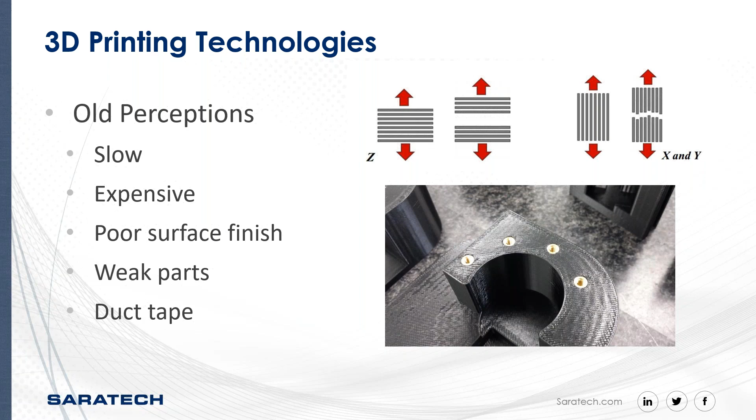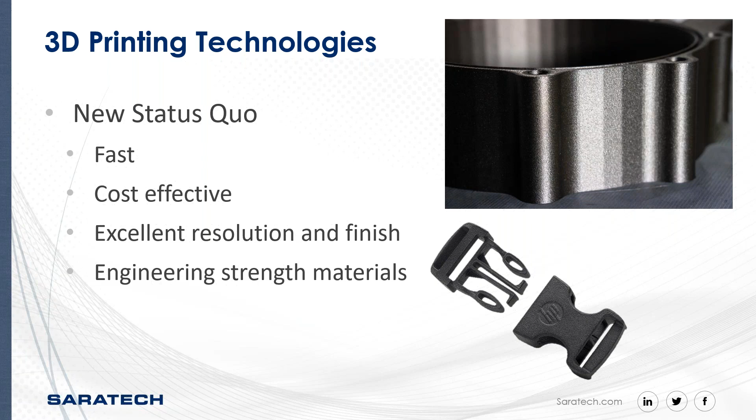As an engineer, we love duct tape, right? But we don't think of it as an end solution to anything. We think of it as a quick fix. And this really isn't the case anymore. 3D printing technology has come such a long way. It's fast, it's cost effective. As you can see from this photo in the top right, the surface finish is excellent. The machines have high tolerances now, and they're using engineering strength materials that have been tested and have data sheets with them. So it's really come a long way.

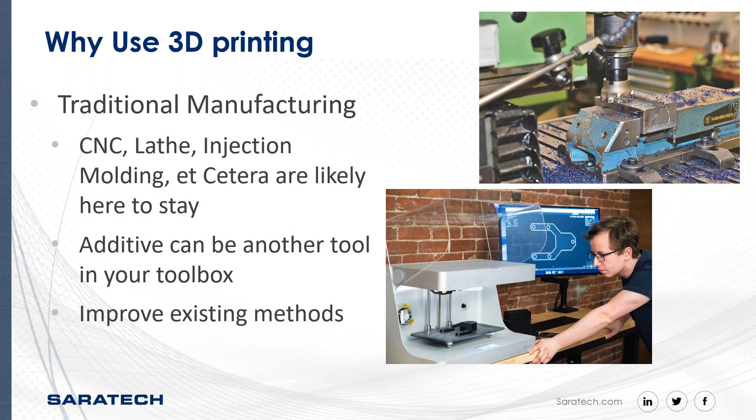And I think that's part of the reason we're seeing the adoption. Now, why use 3D printing? Well, traditional methods aren't going away. Your CNC mill, lathe, injection molding machines, they have their foothold and their use cases. However, additive manufacturing can be another tool in your toolbox. They can be used to replace some of these traditional methods in some cases, or you can use them to augment and improve your traditional methods. Think about a hybrid solution. Maybe you can't replace a machined metal part with a 3D printed plastic part, but you can 3D print the work holding fixture, and that has great time and cost savings associated with it. So that's kind of some of the use cases we'll look at.

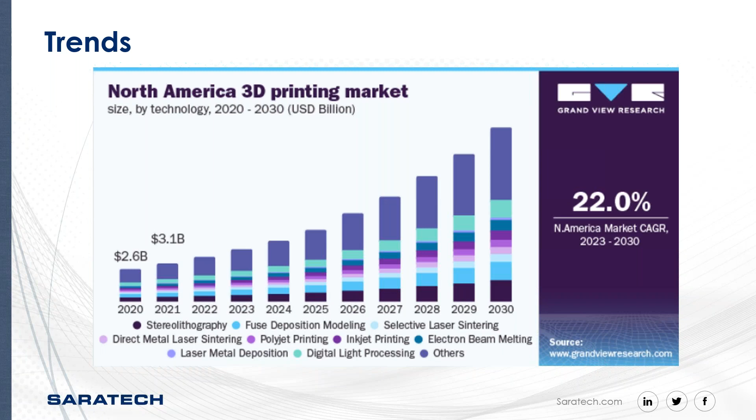Now, this is the way the market is going. A study by Grand View Research estimates that the 3D printing market will grow at a compounded annual growth rate of 22% for the rest of this decade. And they already estimated that the 3D printing market is valued at over $16 billion in 2022. So it's going to keep growing. And this adoption is across all industries. We're seeing it in healthcare, automotive, aerospace, defense, you name it. Other factors like the desire to reduce greenhouse gases, and the COVID supply chain issues we've seen in the last couple of years, these are only pushing the market to adopt additive manufacturing technologies even sooner.

So a little bit about Saratech and the product development lifecycle. Saratech provides engineering solutions in order to help companies realize better products. We offer engineering services, software, and manufacturing solutions to improve the product development process.

And we see additive manufacturing as an important part of that process. I think that a lot of people only see it useful in maybe the design and prototyping phase, which it is very useful in those cases. However, it can have a great impact on the other aspects of the product lifecycle too, in your development, your validation, and your manufacturing.

So these are the aspects we're going to talk about today in the webinar. It's not a complete list by any means, but we are going to talk about how 3D printing can be used specifically in product design and prototyping, assembly and inspections, and lastly, end-use part manufacturing. So in order to do this, I'm going to present these different applications, and each application is going to showcase a different 3D printing technology.

In engineering, it's super important to choose the right process and materials for your application. And for that reason, Saratech has a variety of 3D printing technologies in-house that we have available to use.

We'll briefly talk about the HP 3D printing multi-jet fusion technology, which is a powder bed solution. It's a really great 3D printer that can substitute injection molded parts in small volumes.

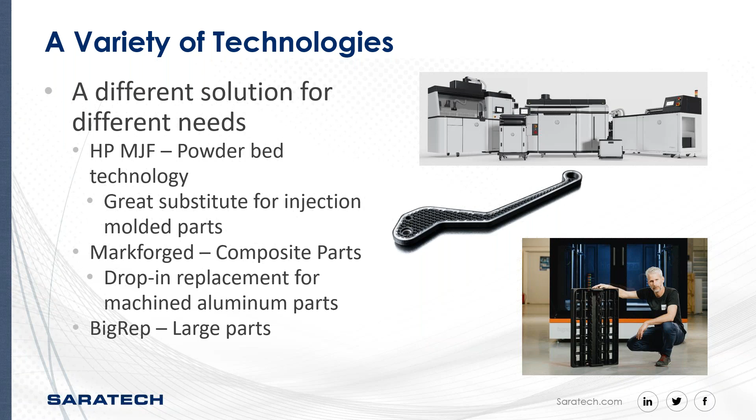And lastly, we'll see an application using the BigRep printer, which is a massive build volume printer. It has a 1 meter cube build volume, and it works with a variety of different thermoplastics. So we'll see a great use case with that.

So let's start off with product design. 3D printing will enable you to iterate and get your design into production faster. You'll have faster access to prototypes by cutting down on lead time for machined parts, which in some cases can be weeks or more. And you'll be able to test out multiple designs simultaneously, which would have been cost prohibitive, say you were machining them, right?

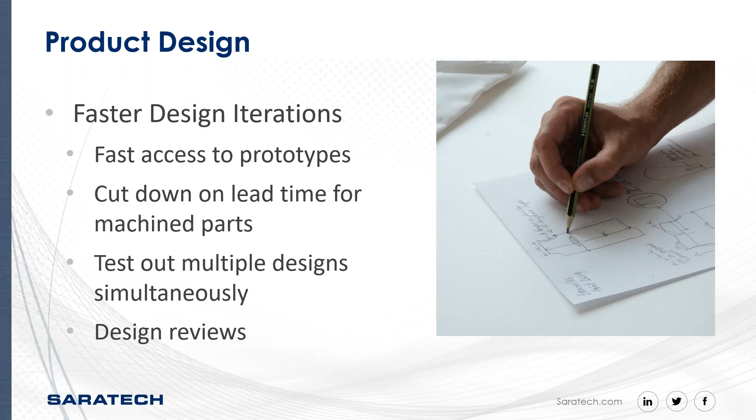So you could print multiple iterations of one design, and if you're using a fail-fast method, you can hone in on the design that is going to work best for your application. And also another benefit to 3D printing your designs is that you can have design reviews with your colleagues. You can collaborate on your ideas more effectively.

So let's look at our first application. This comes from a company called Centor, and they manufacture high-end windows and doors for residential and commercial applications. They have premium products, and their doors and windows have these very complex folding hinge mechanisms. So to test their designs before production, they had 3 full-time machinists to produce their prototype parts.

And oftentimes these machinists were so busy making parts that they would also have to supplement and outsource with other companies manufacturing for them. So as you can imagine, this led to a couple issues. First off, inconsistency, right? If they were not manufacturing the parts in-house, they had less control over the quality of the parts they were receiving. And outsourcing parts is pretty slow. You have typically lead times of multiple weeks to get your parts shipped out to you.

This company, Centor, adopted the 3D printing technology from Markforged, which, if you recall, is a nylon-based 3D printer that can route continuous carbon fiber and other sorts of fibers in your parts to make extremely strong end-use parts. And they adopted the technology and were able to cut down their lead times for prototypes. Instead of weeks for manufacturing, they were able to print in-house in just 12 hours for a lot of their prints. Huge time savings. You can imagine how much that speeds up their product development.

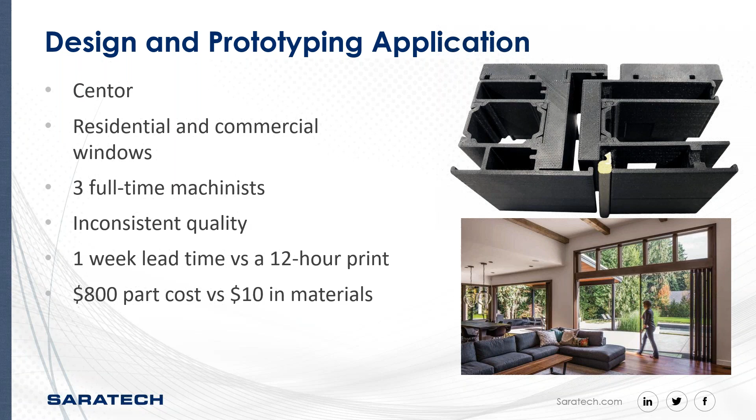So the next application that we'll talk about is assembly and inspection. So this would be the next step in your product development, right? So 3D printing can assist with the assembly and manufacturing, and it can help you make custom jigs and fixtures that would take otherwise a very long time, as we'll see in our next example.

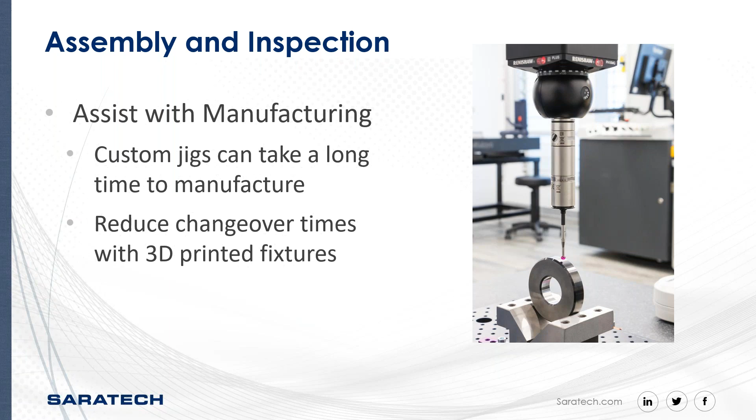And it will also help you reduce changeover times. 3D printed fixtures are much easier to update and change and print than it is to make a traditional fixture that may be machined, have calibrated parts on a breadboard. So let's go ahead and take a look at our example of this. And this comes from Ford in Europe, where they are manufacturing passenger vehicles. And one of this here is a welding fixture.

You can see in this photo in the bottom right a welding fixture that they have. It takes over 190 parts to make this fixture, and it's all traditional parts - breadboard, standoffs, toggle clamps, all of the things you would use. You're using this on body panels and other parts. It takes a technician a very long time to set this fixture up, and there's no reusability to it.

Could you imagine spending weeks and weeks making this whole fixture, and then the next model year comes out, the body changes, and you have to start from scratch all over again? It is a huge time sink to have your manufacturing go through this process every time.

Now they purchased a Big Rep Pro printer - that's the printer we talked about before. It has a massive build volume, 1 cubic meter, and can print with a variety of thermoplastics: PET, ASA, variants of PLA. Very versatile machine. This entire fixture, which previously took them over 3 weeks to set up and tune, they were able to replace with a 3D printed fixture that took just 3 days to print.

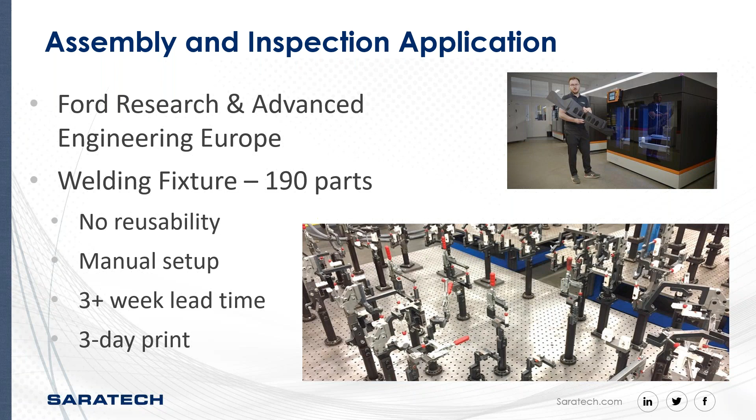Absolutely incredible. The owners of this machine said that with all the time they spent on labor setting up these fixtures, after they adopted the Big Rep machine, it literally paid for itself after just 3 prints. That is really an incredible use case.

At the same Ford manufacturing plant, they're also using it for a variety of other things, such as making alignment tools for the badges that go on the back of the vehicle. They're able to make these parts overnight, so they're not shipping out and waiting weeks to get custom parts made. As soon as the car gets updated with a new body style, they can 3D print that again and have it in use the very next day. Really interesting use cases of how this can be used within your manufacturing plant, supplementing your traditional methods of manufacturing.

The last aspect we'll talk about is end-use parts manufacturing. This is very interesting because, like we talked about 3D printing being duct tape, you would never think of selling a product that is duct taped together. But with HP technology, it really can make these end-use parts in medium to low volume production runs. Typically, if you're doing hundreds of thousands of units of a part, it makes sense to spend the money on tooling and injection mold it, absolutely.

But if you're making medium to low volume, you have to weigh out whether or not it makes sense to pay for that tooling cost. This HP 3D printing technology is a powder-based solution, and it's extremely fast. You can print full buckets of parts in just a matter of days - it's a really great technology and a good drop-in replacement for injection molded parts. Another benefit is you don't require an experienced machinist to set up and run these machines. The system is mostly automated, so it really cuts down on labor and costs.

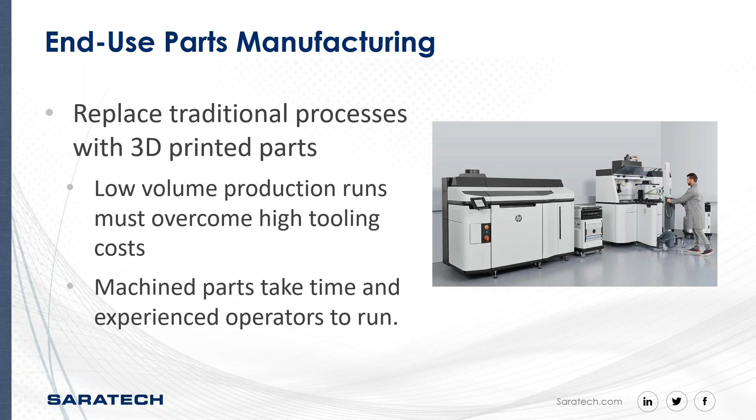One application that uses this HP technology comes from Alcon. They're an eye care company that manufactures surgical platforms for eye surgeries. As you can imagine, they're not making hundreds of thousands of units per year - more on the order of a few thousand per year. So a part like a blow molded duct, for example an internal air duct, can be very expensive, because tooling for blow molded ducts runs a minimum of $5,000 for a very simple mold, and can cost tens of thousands of dollars for more intricate molds.

By printing these air ducts on the HP printer in-house, they were able to realize huge cost savings. They did purchase this HP equipment - they have 2 full systems running full-time at their facility, and they're seeing massive cost savings by printing these parts in-house rather than outsourcing them to be blow molded in a traditional method. It's really incredible to see that these 3D printed parts actually make their way into a surgical device that goes into a doctor's office and is used safely with patients.

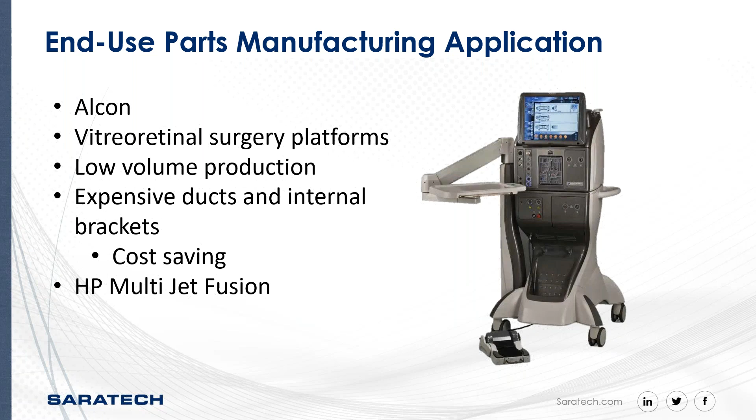Really great case study. The last case study we'll look at comes from a company called Smile Direct Club. You may have heard of them before - they make invisible aligners, and this is not a new thing by any means. The way you typically get these invisible aligners done is they send out a kit to you. You take an impression of your mouth, send that into the company, they scan it and use some sort of software to digitally move the teeth into the desired position.

Once you have that new model of where you want the teeth to be, you'd print that off, then vacuum form your aligner tray. So it's a lot of steps, and it's typically very expensive. 3D printing is not new to this process by any means.

SLA technology, one of the oldest 3D printing technologies, you may know it as resin printing or stereolithography. It's been used in this industry for a long time, and it's very accurate and high resolution. The problem is it's messy and slow. You have resin going everywhere that can be very toxic, you have to use cleaning agents, and it's not the fastest technology.

A company like Smile Direct has to produce 50,000 units per day. And keep in mind, everybody's teeth are different, so these are 50,000 unique parts. That is a massive manufacturing problem to solve, and the only way you can do it is with 3D printing.

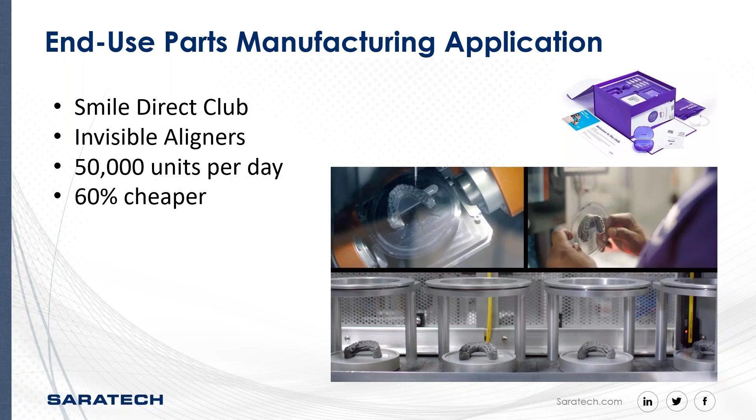These are really incredible use cases we talked about. It's no wonder companies are turning towards additive manufacturing. So hopefully at this point you're asking yourself, how can I adopt 3D printing? How can I benefit from this technology? Well, really there's two avenues.

The first way would be to purchase equipment. Like we saw in the last use case, they brought 3D printing in-house, and that gives you very fast results with a lot of control. However, the other side is that it requires a large capital investment, and you have to have the resources to run and maintain the machines. So that's one way you can adopt the technology.

Another way is through outsourcing. Maybe you're not ready to purchase the equipment yet, and you can outsource it to a 3D printing service. There are benefits to that as well, because you'd have access to different technologies and expertise. You're not locked into one 3D printer with one type of material, you can access a whole variety. So really two ways you can go about adopting this technology.

Saratech can help you with both of those. We do sales, service, and training, as well as offering to outsource your print services. All of the examples I showed you today, we have all the technology to print those parts. We have the HP system, the Markforged system, and the Big Rep machines. We have very fast turnaround times, we're local here in Southern California, and we have competitive pricing as well.

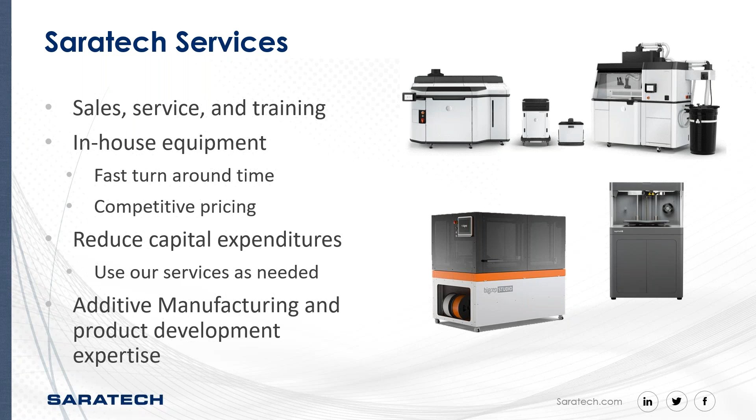So let's say you're not ready to purchase a machine. We're more than happy to 3D print your parts for you. By going through us, you get the additive manufacturing and product development expertise. We're happy to look over your parts with you, give you design feedback, maybe sit down and do a design for additive manufacturing review, and make sure you're successful when you're 3D printing your parts or adopting the technology.

So, takeaways from today: 3D printing has come quite a long way. There are so many applications we saw, and that was just 4 applications. There are so many applications where 3D printing is saving customers time and money, and if you're not adopting these technologies, there's a good chance you're missing out on cost savings there. So the last takeaway is that Saratech has the expertise and engineers available to help you adopt this technology and realize this yourself.